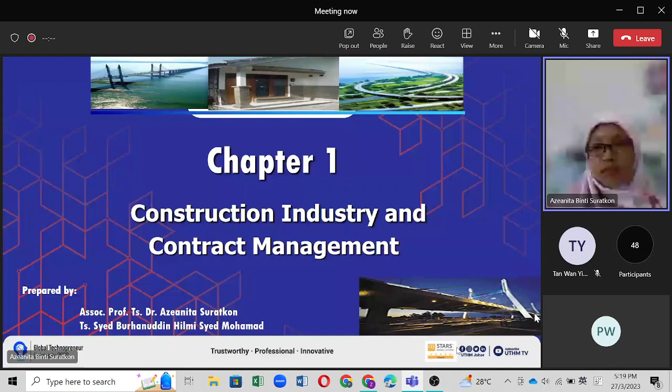Right, okay, so this is for chapter 1: introduction to construction industry, project management, construction management, and contract management. So the second one, we try to distinguish a few terminology. And then the third one is more on who are involved in the construction project and contract management. I think this is also not very difficult for you.

And then this one is stages and process of construction project. Okay, so we try to cover at least today: introduction to construction industry, project management, and maybe the first 3. We try if we can go until 6 o'clock.

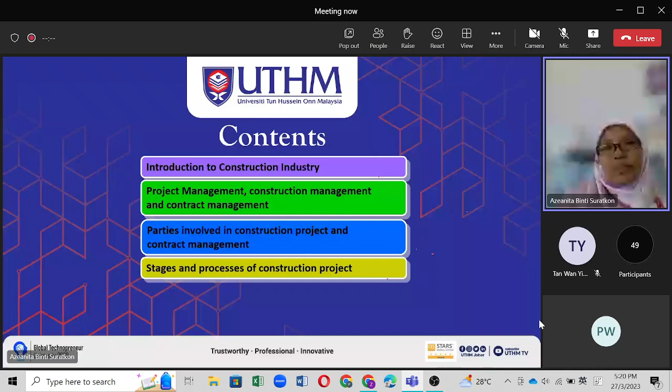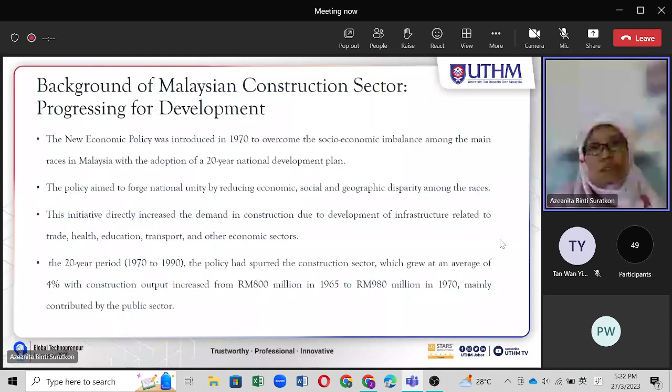Okay, so I want you to go through this NCP 2030. Maybe I will give a very light discussion for you to discuss in group and then present in the class, while in the class. Very light exercise. Right, okay, so you can read this on your own. So this is also, you can find it in the NCP 2030.

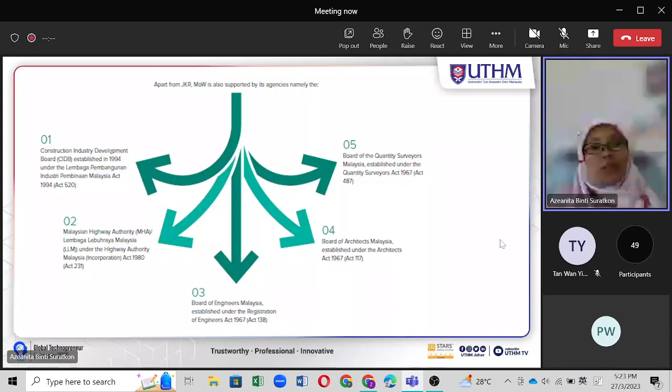So this is just an overview of what are the organizations actually involved in gearing our construction industry towards a better level. Okay, so we have CIDB, established in 1994. And then we also have Malaysian Highway Authority, or Lembaga Lebuh Raya Malaysia. So this is our highway authority. Okay, we also have BEM, Board of Engineers Malaysia.

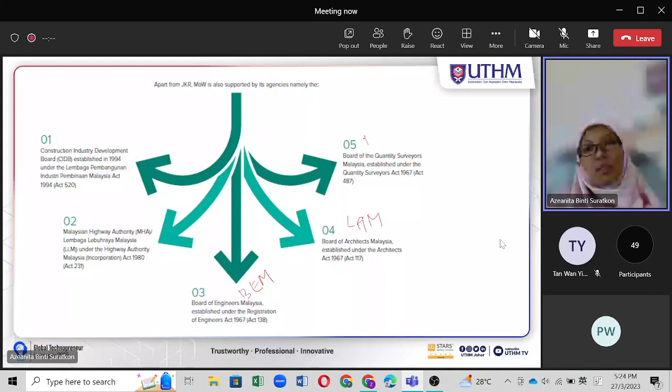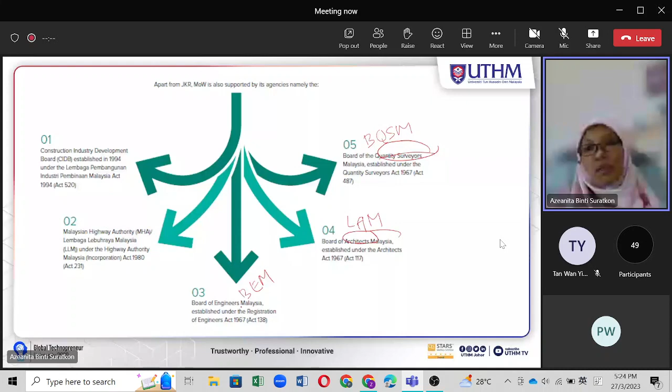We also have Board of Architect Malaysia, they call it LAM in Malay, Lembaga Arkitek Malaysia. Here we have BQSM as the quantity surveyors. So these are three personnel that are very important in Malaysia. So we have engineers, we have architects, we have quantity surveyors. Okay, right.

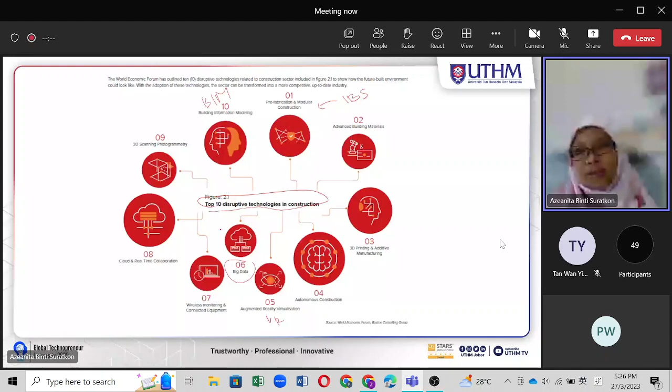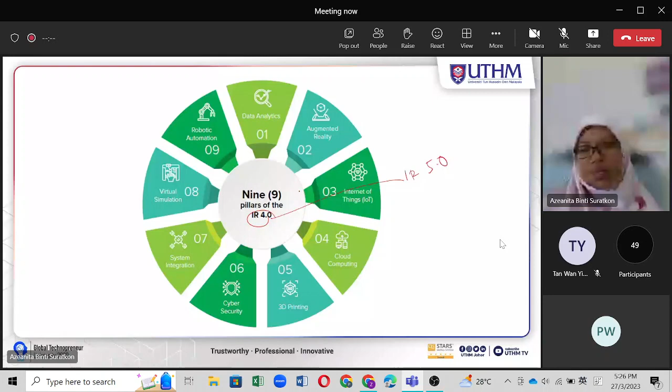Okay, so a little bit on NCP 2030. They have four main objectives.

The first one is to develop a comprehensive, inclusive and people-centric policy, through integration of planning, designing, procuring, constructing, producing, altering, repairing, maintaining, and demolishing of infrastructure.

So how to be inclusive and people-centric, to make sure all the key parties work together. Maybe in the past, the way professionals worked was very fragmented. Now we want all of them to work together in better teamwork. Hopefully with better technology like BIM, it can help professionals work together in an easier way.

Then, to stimulate and enliven a culture of high standard and quality in the construction sector. So how to improve our construction quality, not only the product, but the process, and the welfare of the worker, the labor especially.

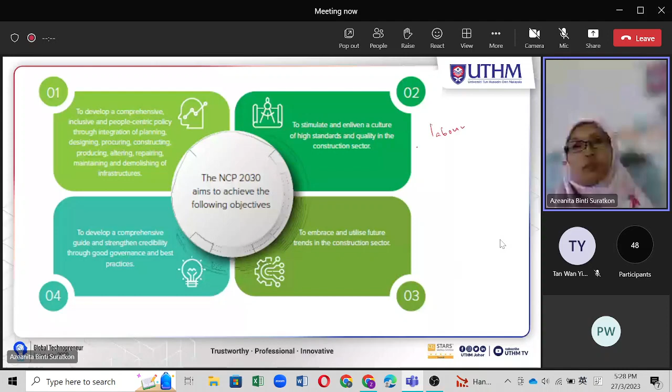It is actually a normal thing - we can see our laborers live in very poor accommodation, right? In Malaysia, we have a very specific terminology, rumah kongsi, right? So this is a very bad reputation, a very bad image for our construction industry. So how can we actually improve better quality of life for the workers and all other construction personnel.

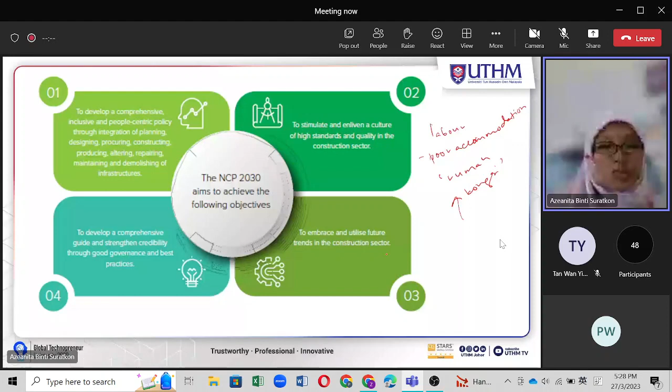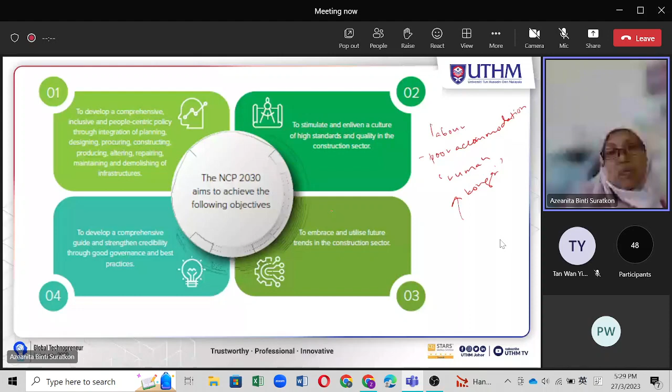The third objective is to embrace and utilize future trends in the construction sector. And the fourth one is to develop a comprehensive guide and strengthen credibility through good governance and best practices. I think you can try reading the NCP 2030 to capture the meaning of all this.

Okay, so that is a little bit on NCP. Right, so we move to construction. We always say construction, discuss about construction, but what is the meaning of construction?

Construction refers to the process of building physical structures and related activities. So this is the processes of building physical structures and related activities. There are a lot of processes, not only the construction itself. The related activities - what are the activities? That is construction.

Sometimes, for example, the monitoring of the construction project is also referred to as part of the processes, the related activities. For example, ordering the materials, transporting the materials - that is also part of the related activities.

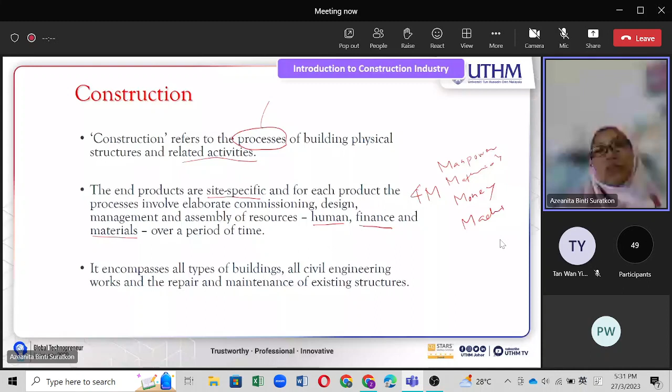So the end product, as they call it, is site specific. Even if I give you the example of schools - schools under the government, normally the design of the school is similar. But even though the design, the appearance, is similar, when the location is different, especially in terms of the soil, the types of soil will influence the pad foundations, the foundations of the building. Due to that, the overall project cost will differ from one to another. So that's why it's site specific.

Then it encompasses all types of building - buildings, civil engineering works, repair, maintenance of existing structures. So construction covers all types of buildings, all civil engineering works, and the repair and maintenance of structures. So it covers everything.

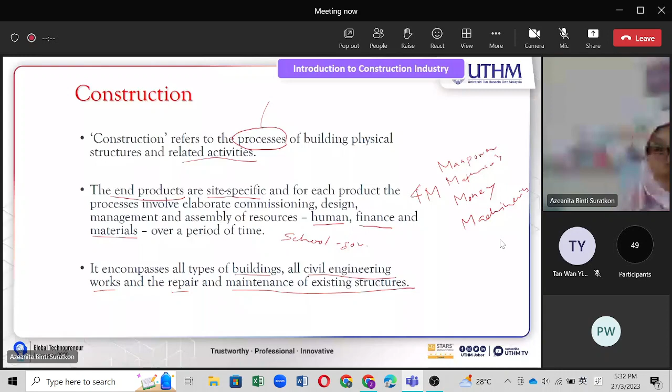Malaysian Industrial Classification, MIC, refers to construction as new construction, alteration, repair, demolition. That is part of construction. The installation of any machinery or equipment which is done at the time of the original construction is included, as well as installation of machinery or equipment after the original construction but which requires structural alteration in order to install. So these are also part of construction.

There are two types of categories of construction: general contracting and special trade contracting. General covers residential, non-residential, civil and engineering construction. Special trade, specialist work, covers metal work, electrical, refrigeration and air conditioning, carpentry, and planting - this is for landscaping. So this is the categories of construction work.

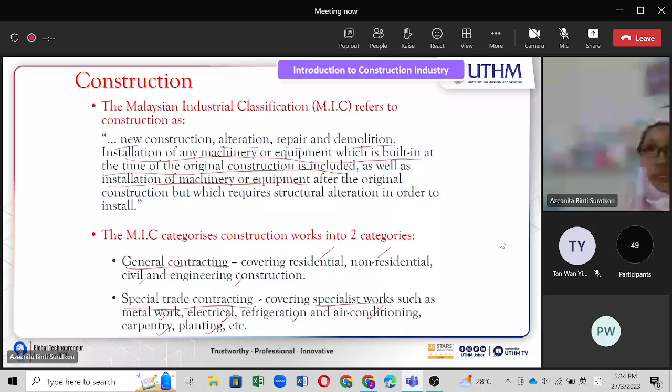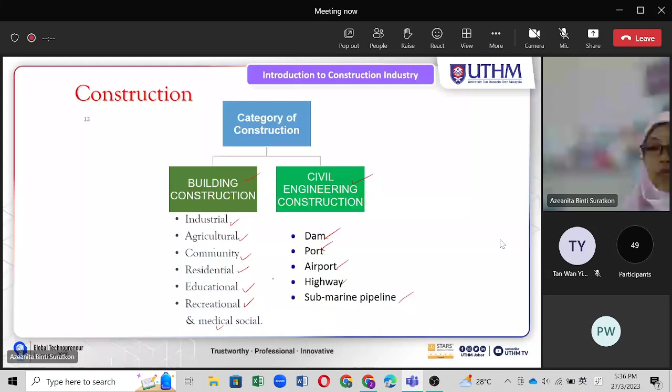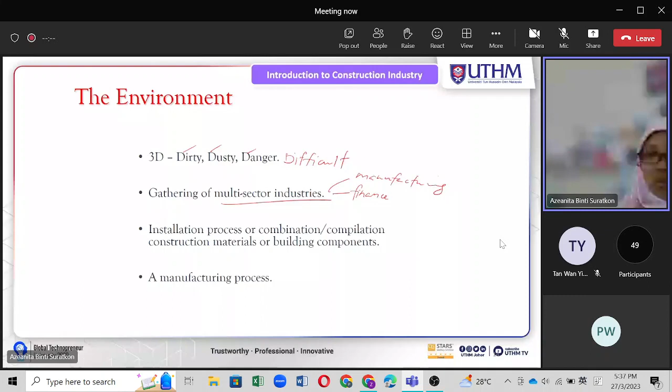And then installation process, or combination or compilation of construction materials or building components. So construction is actually talking about the installation process, or combination or compilation of construction materials or building components, and this is actually a manufacturing process. So construction actually involves a manufacturing process.

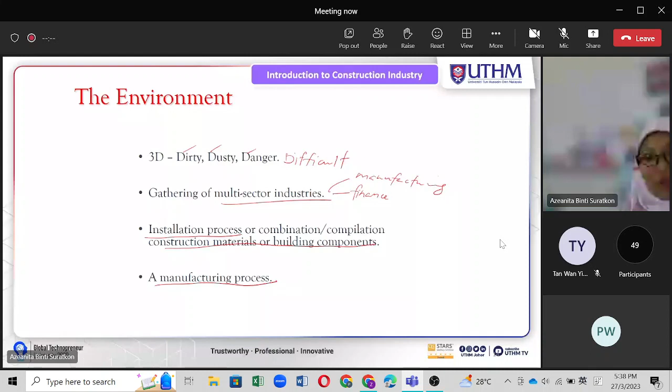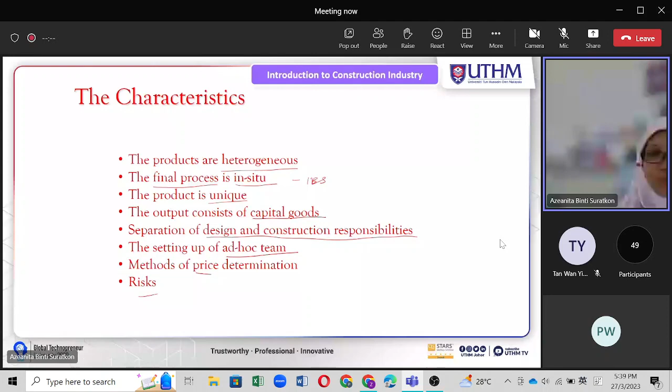The products are heterogeneous, different in terms of design, size, location, and end use. The products differ widely in terms of the materials and techniques used in production. So the size, the locations, the design will make the products unique and different from the others. Like I said just now about the school, even if the design is the same, the size is the same, but the location is different, then the project is still unique, because it involves different piling types, maybe different types of foundation, so the cost will be different.

The final process is in situ. The finished product is actually permanent in the particular location where the construction takes place. So the building, or the structure, or the infrastructure that we build will generally be permanent in that particular location. The final process of construction must be in situ, although some sections of the completed products may be produced elsewhere.

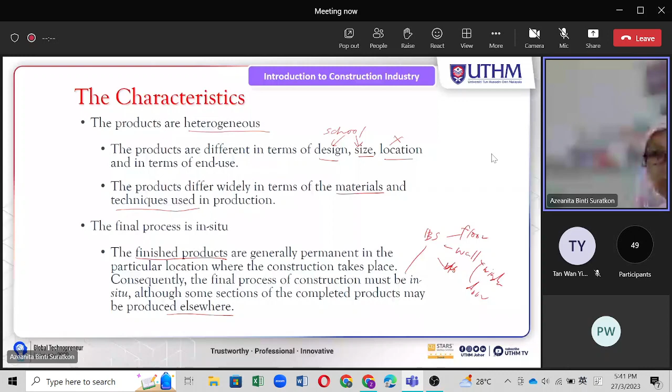There is a limit on the potential for prefabrication. Prefab means we do it in other places, for example, factory, IBS factory. It refers to using component parts or sections of a structure produced elsewhere, perhaps on the basis of economies of scale. If the manufacturing can produce many goods in big volume, they will have better profit but at lower cost. So this is economies of scale.

So meaning, for example, we have standards. There are many standards, for example roof structure maybe. This is also standard, right, made of steel or aluminium. We also have, like for example, column. What else? Maybe we have IBS component. So this is part of prefab.

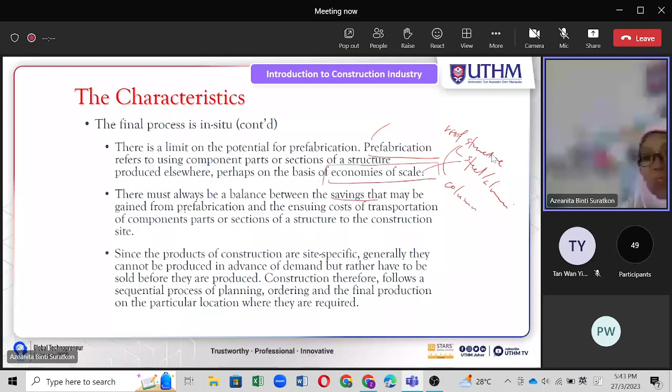There must always be a balance between the savings that may be gained from prefabrication and the ensuing cost of transportation of components, parts or sections of structure to the construction site. So if too much prefabrication, we need to consider high transportation cost. So we need to balance this.

Since the products of construction are site specific, generally they cannot be produced in advance of demand, but they have to be sold before they are produced. Construction therefore follows a sequential process of planning, ordering, and the final production on a particular location where they are required.

So different, maybe car. Car versus house, for example. So we want to do a comparison. Is this statement valid or not? They cannot be produced in advance of demand, but rather have to be sold before they are produced. So is this correct for house? Anybody want to try? Give your opinion on this. Compare house with car. How do you think about this statement? Is this statement still valid for construction?

Anybody want to try? Nobody. Maybe I just call some name. Haziq? Haziq, are you here? Where is Haziq? Okay, Frederick, you have any idea on this? Frederick, okay. Why everybody silent? Hello? Yeah, Frederick, try. You heard my question? Do this statement still valid for our construction industry? What do you think? I guess it's still valid. Yeah, how? How? Got no idea. Sorry, Doctor. It's okay, it's okay. Lina, Chang Lina, do you have any idea? Lina, okay. Anybody? Chang Lina, you are not here? Okay, right, okay. Anybody want to try?

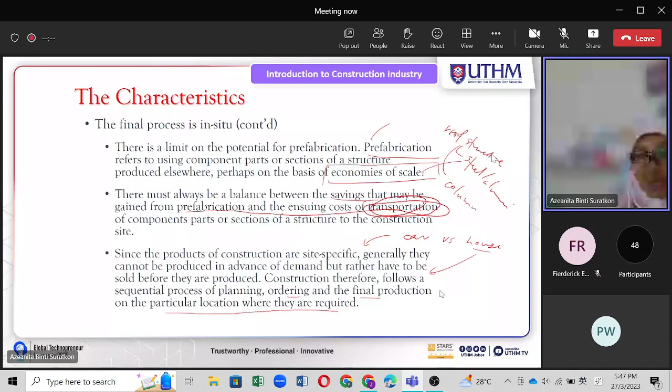Okay, so since no response, I will give this as a quiz. So maybe you have to come up with your own idea why this statement is actually still valid for our construction industry, comparing manufacturing versus construction. Okay, right. I move to the next one.

Capital goods. The output consists of capital goods. Capital investment goods refer to products required for the production of other goods or services in an economy. The products of construction including roads, railways, airports and sea ports, telecommunication, electricity generation and transmission—this is referring to dams—water supply, buildings for factories, offices, hospitals, schools, houses. So these are called capital or investment goods. Meaning with all this, for example the factory can be operated for economic activity. That's why we call it capital goods.

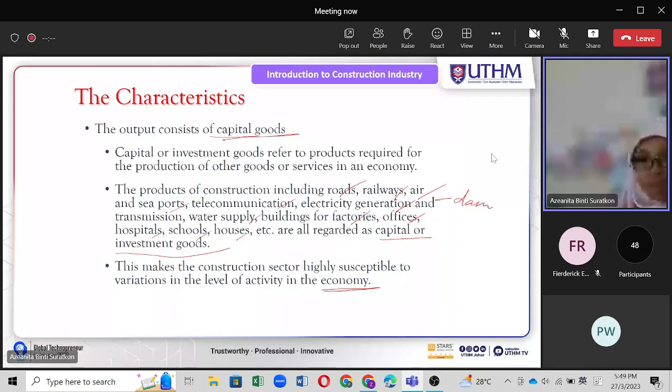Next, separation of design and construction responsibility. This is very common in the construction industry, a general trend. The party that designs the project is normally different from the party that constructs the project. This is normally the consultant. The design is provided by the consultant, and then the construction work will be done by the contractor. Okay, so we call this the traditional system.

Traditional system of construction procurement follows this sequence: the client engages a team of designers to produce the design. Once the design is completed, tender documents are prepared and tender is invited. Tenders are open to contracting firms, and the contracting firms will enter the tender. They give their bid, there will be evaluation, and then the project will be awarded to the successful contracting firm. So this is the normal process.

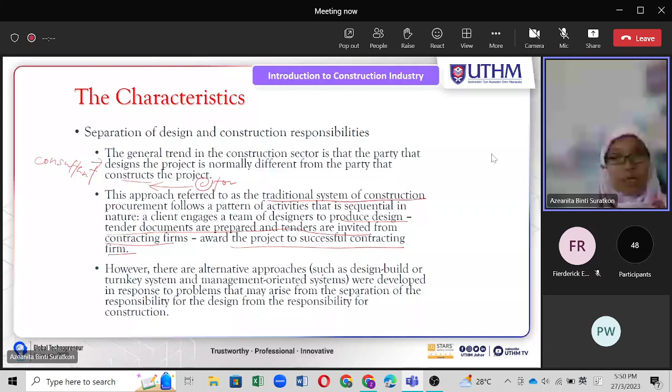So the design and construction is done by different parties. However, there are alternative approaches such as design and build, turnkey system, and management-oriented system. This we will learn in detail in chapter 7, where this system is developed in response to problems that may arise from the separation of the responsibility for the design from the responsibility for construction.

So the issue is design is done by the consultant, construction is actually done by the contractor. Sometimes the design is provided by the architect, especially for building, the design is prepared by the architect. So sometimes the design is very futuristic, very artistic, and it is difficult for the contractor to build. So the contractor and also the design engineers, sometimes it is very difficult to design the structure for the building due to very artistic design of the architect.

So that is actually what we are talking about, the constructability of the design. So the design is very futuristic, but very difficult to design, very difficult to construct, meaning that the constructability is low. So constructability or buildability is the terminology for how easy it is to transform the design into the end product, to the physical building. That is buildability or constructability.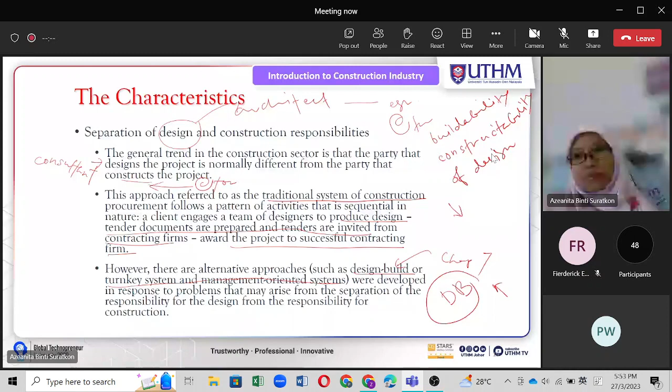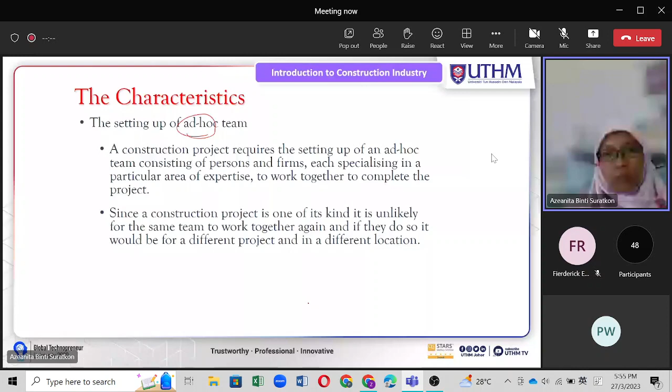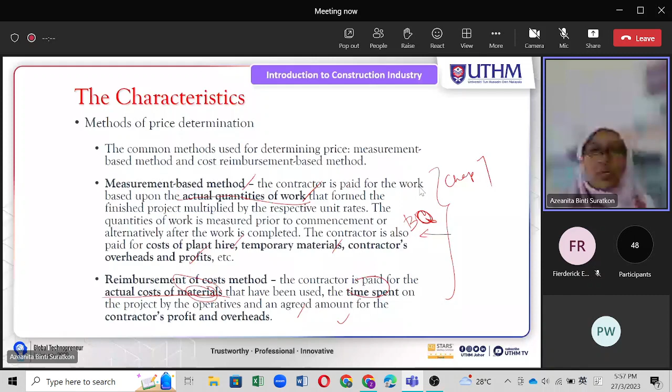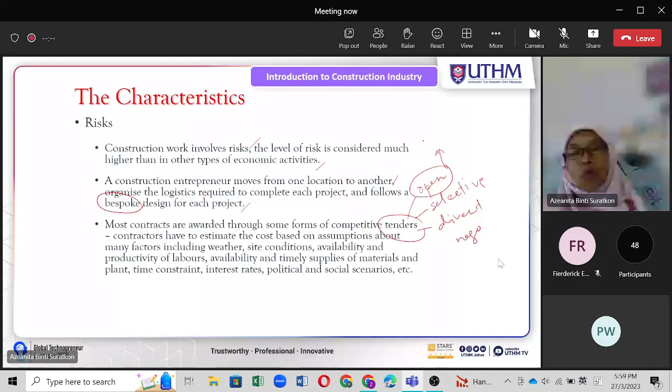This will actually contribute to different degrees of risk to the client and also to the contractor. So normally for open tender, this will give a chance for the client to have a competitive contractor, to see the price and quality of the contractor, so he will be able to get the best contractor compared to the rest.

Okay, so this we will learn later in Chapter 6.

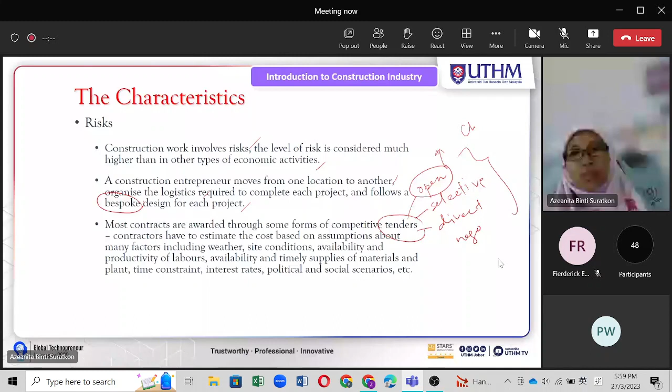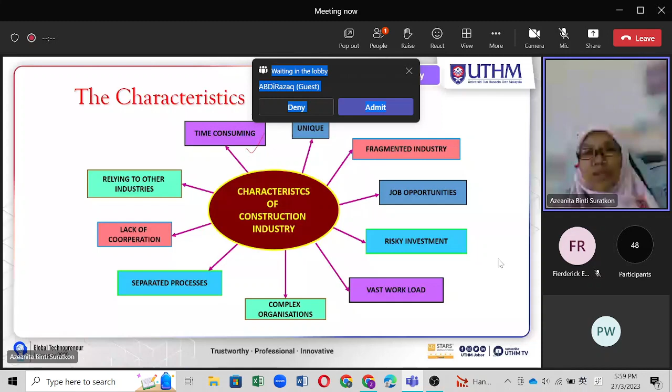So this is also another way of illustrating the characteristics of the construction industry. Time consuming - we understand this is very common for construction projects to have delay, very difficult for a project to really finish on time.

Unique, fragmented industry - this is what I just mentioned. Design is prepared by the consultant, and then the contractor will do the construction. So they have a fragmented industry.

And then job opportunities - this construction industry actually provides many job opportunities. If a project is started in one area, they will not only provide jobs at the construction site itself, but also influence the economic activity around the area. For example, selling food, or locals who can rent their houses to the workers. That is an example of how the construction industry can stimulate other economic activity.

Okay, and then risky investment. This is very risky, not only for the client but also for the contractor. If something bad happens, for example COVID, last time we had MCO, the project is delayed due to that. For example, for flood, the project has to be delayed. So that is very risky.